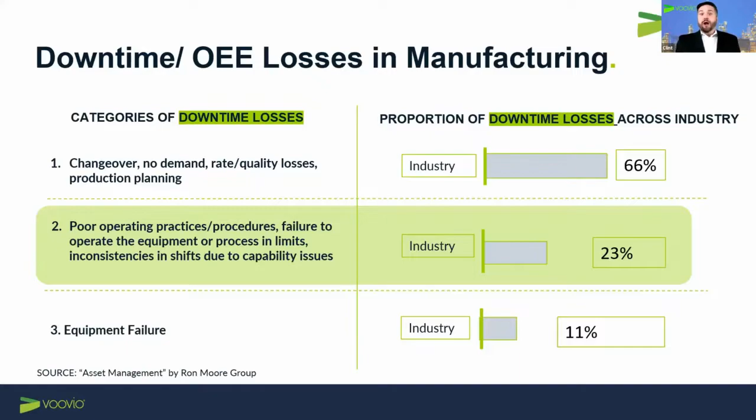There's another group, another way we'll look at this thing, that there's a group called the ASM Consortium, the Abnormal Situation Management Consortium. This group has taken a closer look into process upset causes and have made some quite interesting observations. This ASM consortium is made up of several industry leading chemical manufacturing companies, as well as educational institutions of higher learning.

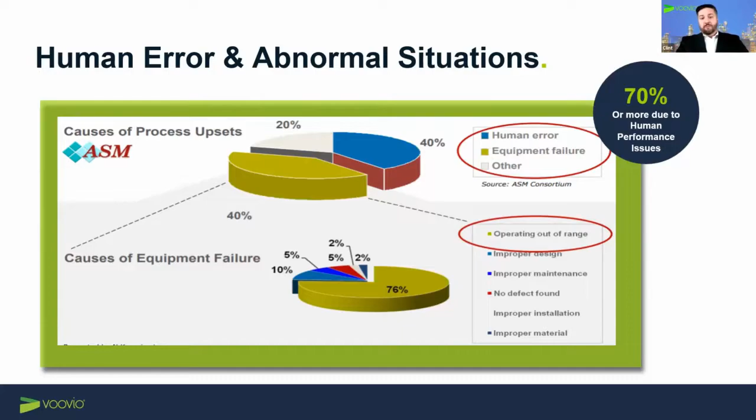As shown in the charts, they observed about 40% of process upset causes are the result of human error. Another 40% are due to equipment failure, with the remaining 20% being an assortment of other minor categories. Though, when broken down further, about 3/4 of the equipment failure category actually traces back to incorrect operation of the equipment, which ends up resulting in 70% of abnormal events being the result of some type of human performance.

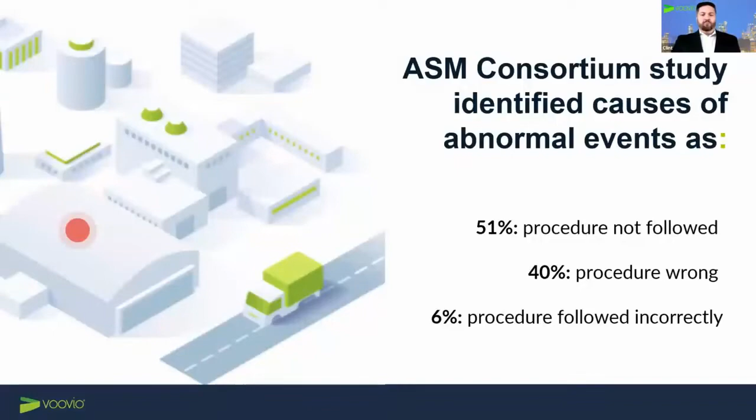So that same group observed that the vast majority of these situations that led to nearly all of these types of events would trace back to procedures, whether they weren't followed, whether they were simply incorrect, or maybe the operator didn't follow them correctly.

Obviously, the consequences of such events can be felt in the impacts to bottom line and profitability. Most obvious and immediate to most are the out-of-pocket repair costs if equipment is damaged. That's what we pay immediately to get back up and running.

But most of the time, the larger costs are actually from the areas where we don't write a check or pay money out to someone. The lost production and the profit that would come with that is tremendous. Then there's also the costs that are difficult for many businesses and companies to quantify, like redirecting those key resources, which we've already said are in short supply, to fix those situations or get the plant back up and running and stable, instead of working on optimizations or improvements that personnel are better suited to do.

Budgets and key resources required for these efforts are pulled away in a normal budget plan from other desired activities, debottlenecking and other profitable initiatives. So it doesn't just start and end with what we pay. The costs continue to spread throughout the business and organization.

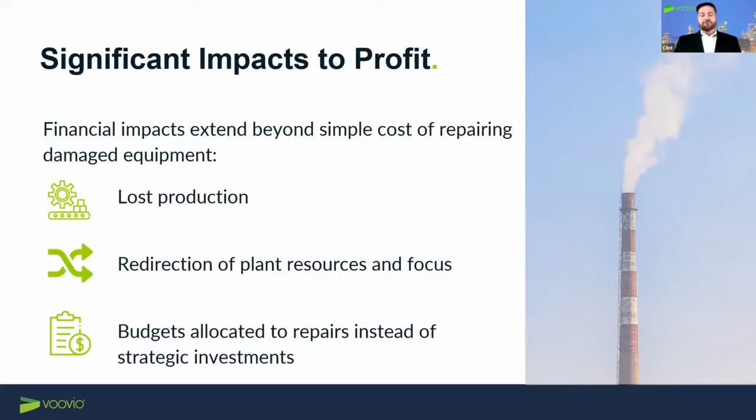Onboarding new employees is difficult and resource intensive. With most of the current training methods, operators are released as what we call qualified in their jobs without truly knowing or experiencing even up to half of the information necessary to be fully competent in their roles.

Those startups and shutdowns that may not happen while that operator is in training, that tribal knowledge is all those tips and tricks that decades on the job have taught these employees that are near retirement. We've got to capture that stuff quick, or we'll be forced to relearn it, and that's going to come with quite an expensive price tag. What a waste.

I think another interesting challenge that's being uncovered as we continue this 4.0 conversion in the industry, as we go through the automation and reliability improvement journeys, are the paradoxes we've seen by improving those areas. As described here, the more we improve in both of those areas, we simultaneously reduce the frequency of those events happening, which is obviously a good thing, though we mustn't lose sight that the potential loss of experience dealing with the issue may affect us in the future.

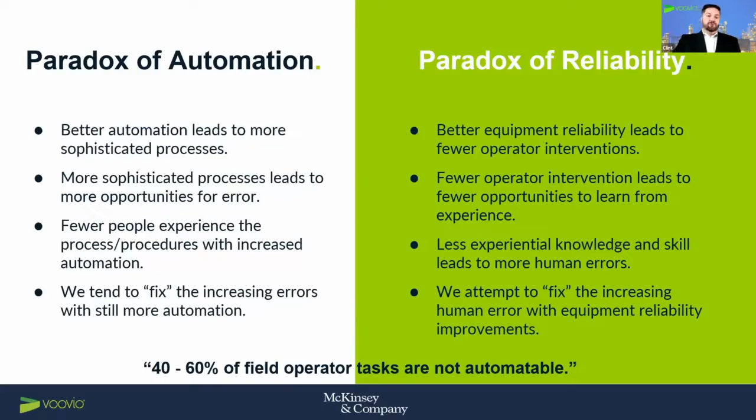McKinsey tells us that somewhere between 40 and 60% of field tasks are unable to be automated. So we will not be able to completely automate our way out of this problem. We must be active. We must take action to capture and retain the knowledge within the organization while it still exists there today.

So the solution Voovio brings to the table, our operational excellence tool, will impact what we call overall workforce effectiveness, OWE. Now that's in addition to the OEE, for those paying close attention in the beginning.

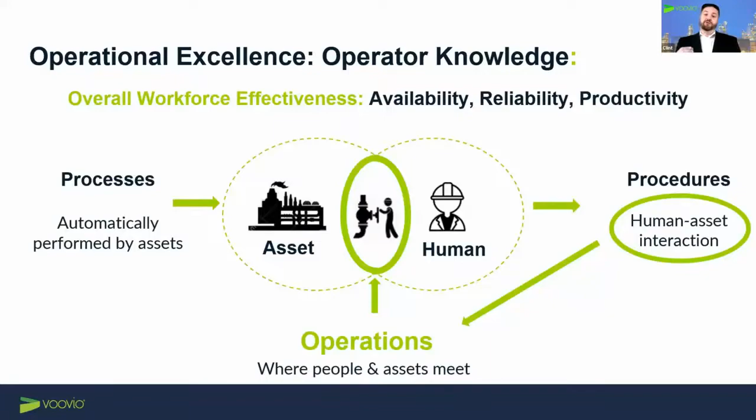Traditionally, much focus has been placed on the asset and improving its performance and ability to provide and extract information on how it's doing. But plants are made up of both assets and people. The improvement of the human elements has not progressed or received the attention at the pace or level of the asset improvements. And that's precisely where Voovio is going to fit in, right at that intersection of assets and people.

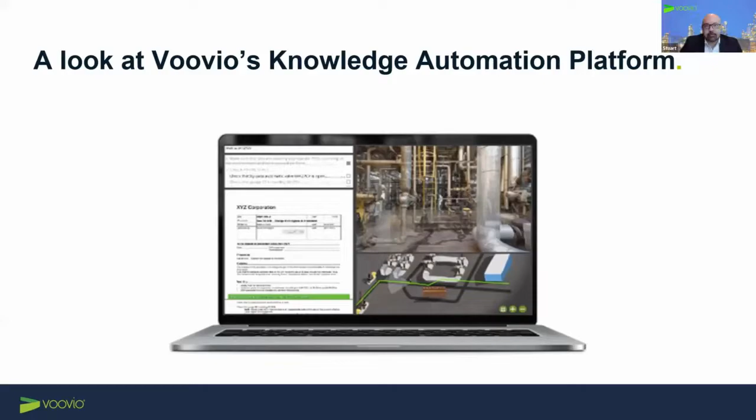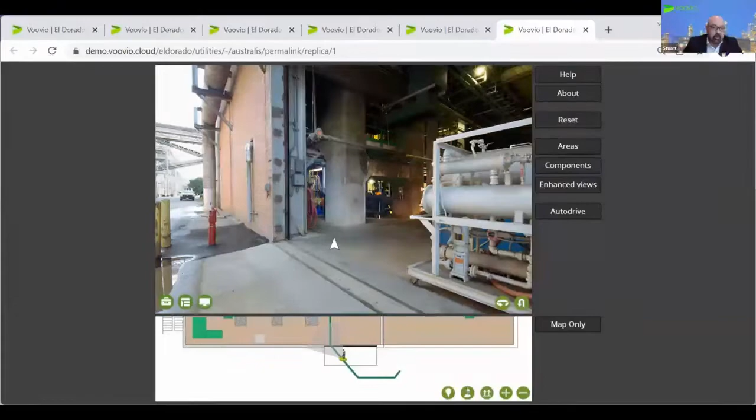Okay, thank you. So here we have, to introduce the Voovio platform to you, this is a cloud solution and it's web-based. As you'll see here on the screen, you have the home page, which has our digital replica, and below it you have the procedure simulators. Now, what do we mean by procedure simulators? We take your standard operating procedures, which drive the simulation of Voovio's. As you'll see in front of you, there's a pictorial, photographic image of a plant. Now, when I open up and press on my mouse, you'll see a white line appear. I'm actually driving this.

So what you'll see here are pictures of this asset. As I move freely into the plant, you'll see a transition start to take place. And as I move freely through the plant, just by moving my mouse to the left, you'll see that we'll make a turn, and I'll move freely through the actual pictorial images of this asset.

Now, this is where the magic of Voovio's technology comes into play, that it gives you a truly immersive experience, allowing you to traverse through the plant very freely. Again, all of these are pictures.

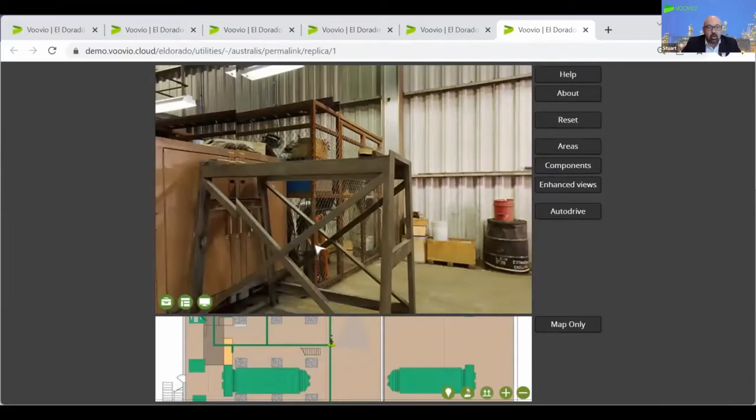You'll see here that I can actually click on an instrument. All of your instruments are tagged. Everything is there, all instruments are put in, and again, with your standard operating procedures, you see that I can play around with that. I was discussing every single instrument that's been tagged.

Also, as you know, when operators are out on the plant, they may be searching for an instrument that they have to perform a procedure on. So we have a module or component here that allows you to search for a specific instrument around the plant. If we click on what I've just searched for, you can bring it up and interact with that specific instrument. Also, the map component.

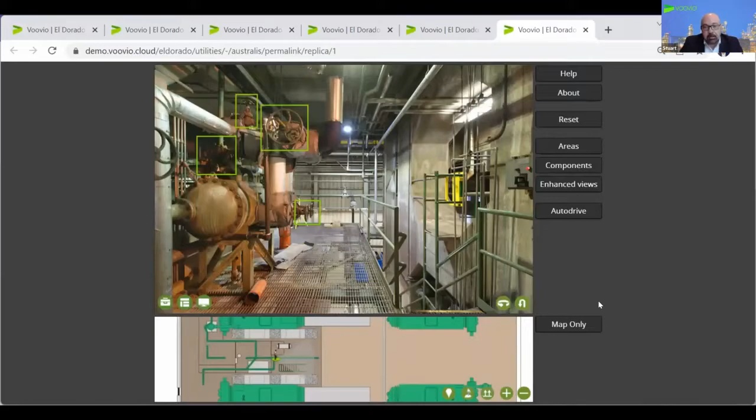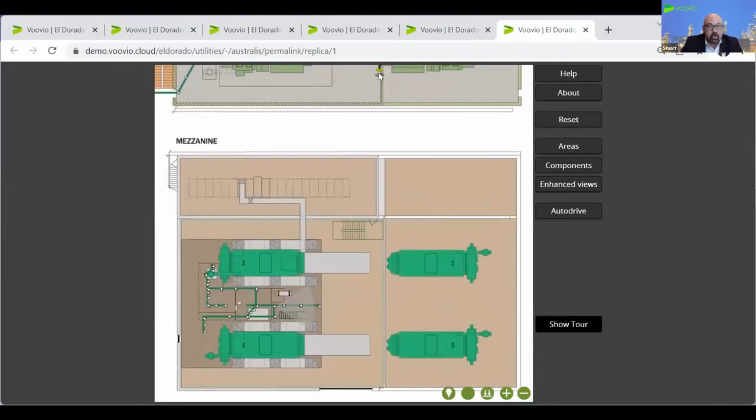Now, this allows you to position yourself anywhere in the plant. So, for example, if I pick my avatar up, which is my little guy here, I can move him wherever I want to in the plant, which allows me some free movement around the asset.

As well, we have enhanced views. So, for example, this cooling water circuit. If I bring that up, it looks fairly straightforward. I mean, everything looks exactly the same there.

But if you have an operator that hasn't done the procedure that's being asked of him on this specific instrument, he doesn't exactly know what's happening behind that. The subject matter expert may well have done this procedure many times and knows exactly what happens behind the scenes. But to a new operator, or somebody who lacks knowledge of doing this procedure, they take a look at that and it looks exactly the same.

You've got 4 manifolds there. He's been asked to connect the upstream loop with the downstream loop on the right-hand manifold. Well, how does he do that? So we have quite a nice feature here where we can actually turn everything on and see what's happening behind the scenes. You can switch your valves off and on so that you can actually connect the downstream with the upstream loop, which is a nice feature in the technology.

And now, so Clint's going to pick up the guided simulation, yeah.

Okay, perfect. So Stuart left off at the guided module. We'll jump right into the guided module. As Stuart mentioned, the guided module is like that virtual unit expert, that senior operator or subject matter expert, whoever that may be, that you want to teach these new operators, or new to the area, or refresh them.

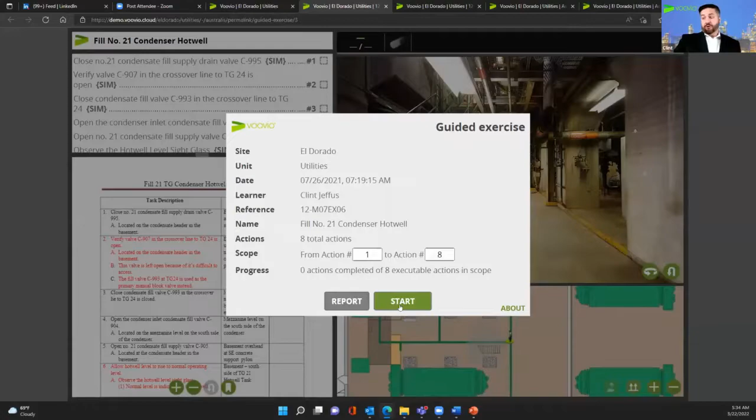As you'll see, I have a simple solution here. The start, when I hit start, it's going to walk. I'm not moving at all. So in this guided module, what you have is several sections.

To the bottom left right here, you have what would be the company or the client procedure. This is something that Voovio would not adjust or change. This was something that would be owned by the company and would be your procedure.

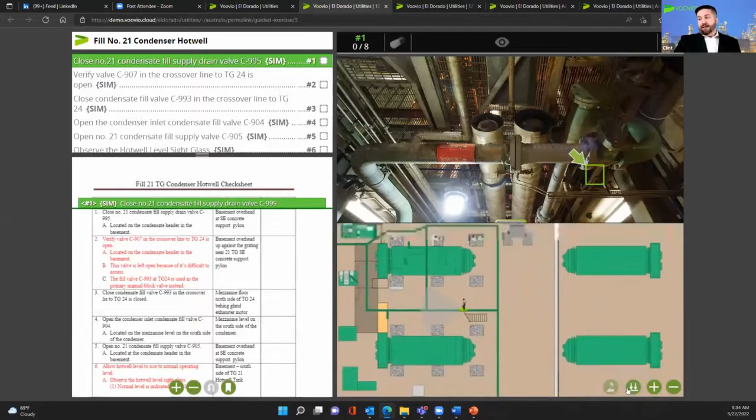Off to the bottom right, what you see is the map that gives you the footprint of where your avatar, that Stuart showed before, would be in relation to the plant and other equipment. What you've got at the top right is the replica, or a copy of the replica, as it pertains to the procedure. This area in the top left is what we call our action checklist, that Fran mentioned a little bit earlier.

We break things down and really get detailed with the procedures. If something says line up the pump, how many valves and drains and things need to be open, we're going to break that all the way down for those guys.

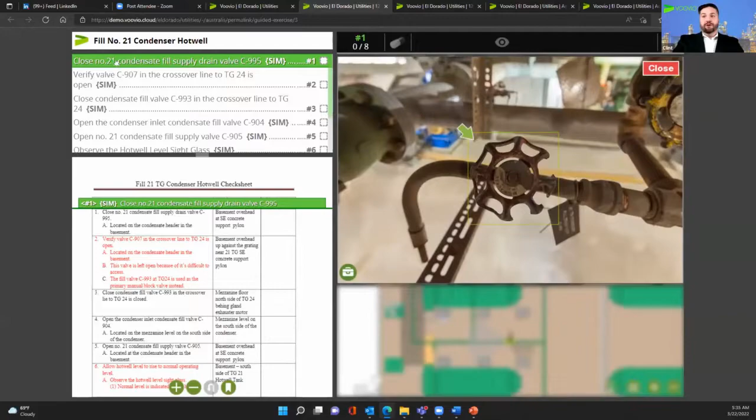So just jumping right in, what you'll see is this tells me exactly what to do. Step 1, close the condensate fill line. So I get in there, I actually interact with the valves. Say I did that, close, move on. The next section tells me right what to do.

Okay, we're going to open it. Key point here, what you'll see is that pop up immediately right at the step where we are.

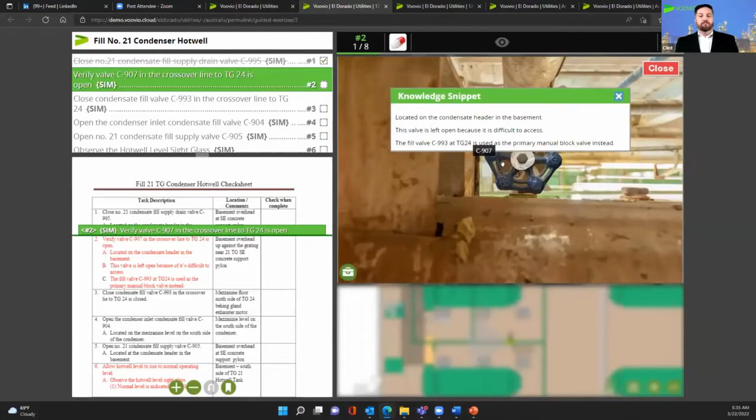This one is just text. This is what we call a knowledge snippet. It comes out of a little pill of information. This one is text, but you can put videos, PPE notices, you can make this anything you want that operators would need at the point of access, to move on and complete their job safely, effectively.

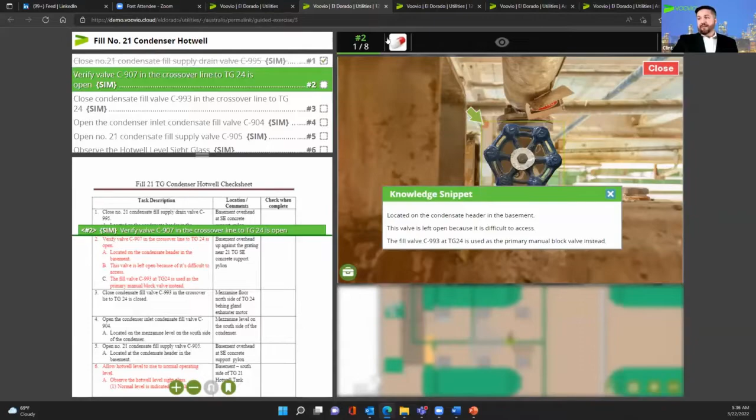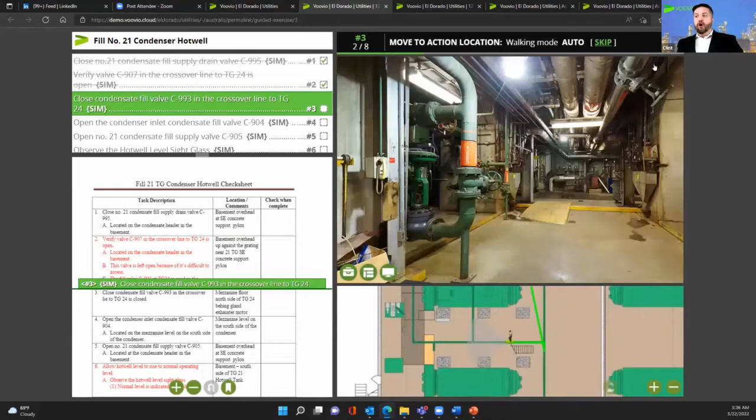So, yep, I got that. I'll minimize it. This says I should check it, close it. Great. And so again, what you see is this virtual trainer, like it would be someone holding your hand, walking you through the unit, going on to the next step.

So I think we get the point there. So then what does this lead us to? Do we just train only? No, so this is what we have, the test module.

You'll see a little bit different, but quite similar. And so here you see you have your procedure document. You also have this test report that shows up. Same format up here with the action checklist and the map available on the bottom right. But this time you see I have no white lines. I have no direction. I have no SME coach. I'm on my own in the test module.

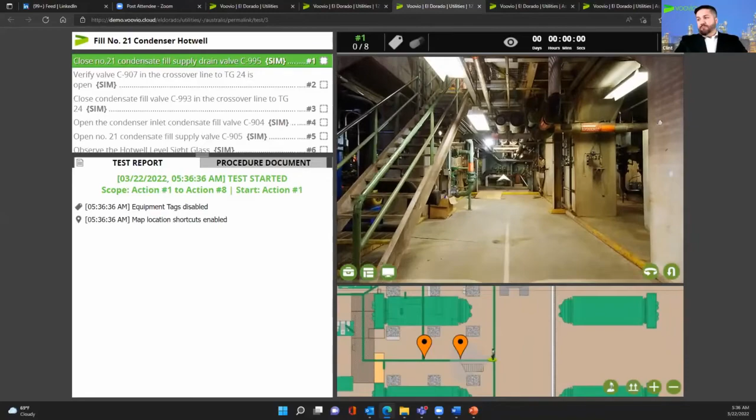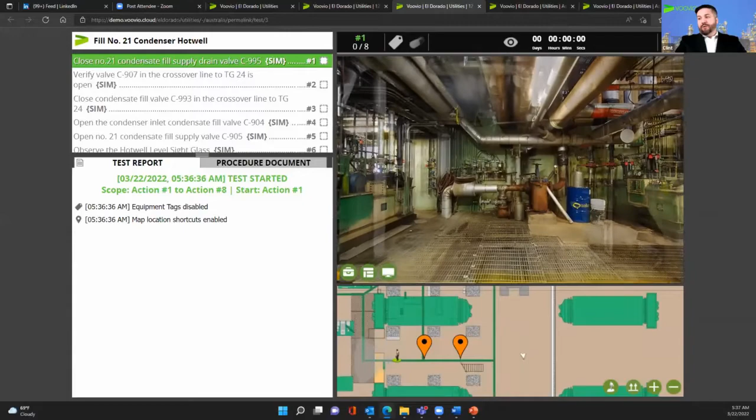So as I move forward, walk down, we can look up. You can see you have the same degrees of freedom that you have within the plant everywhere.

And we want to start where we were before. So step 1, close the condensate valve. So I'm going to do this action. Done. You see what you get here is immediate feedback from your trainer. Yep, green is good, did that right.

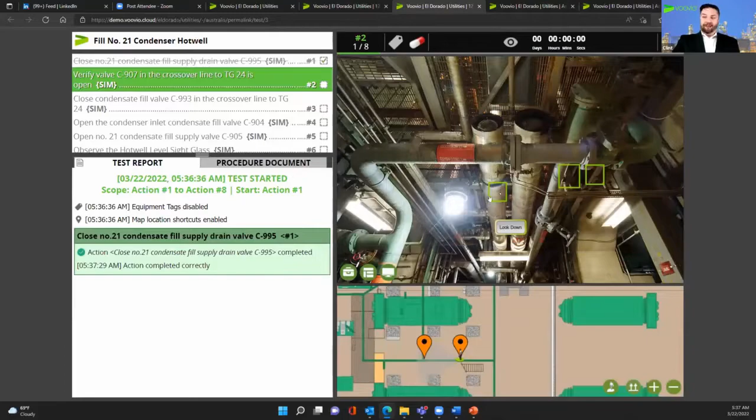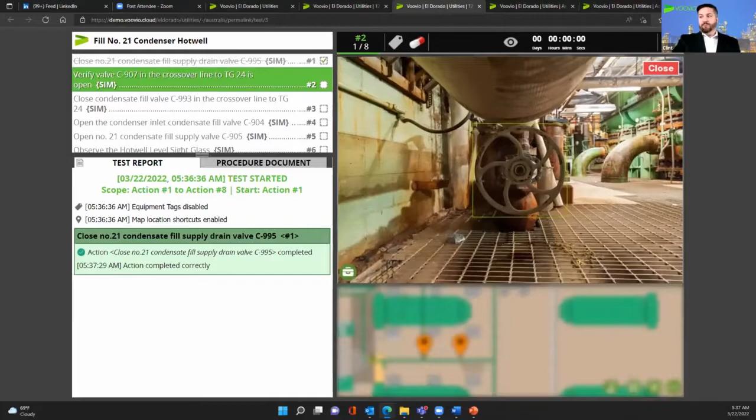Great, so what's next? Okay, I know the next one is this little blue valve that stays open, but let's say, what if I make a mistake? So I'll go down and let's grab another valve. Let's say I think it's here. What happens? So I'm going to open this one. Oh, hang on, I interacted with the wrong instrument. I opened the wrong valve. I did not open my knowledge snippet.

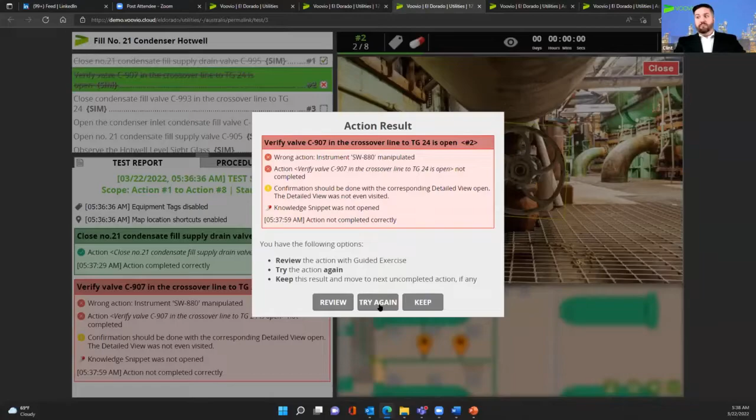It gives you all this information of what you did, what you should have done. And the great thing about simulation, as always, you can review, jump back into the guided module, or you can try again. So you can go back in the simulator, turn back around. I could have picked the guy up and walked him back if I wanted to.

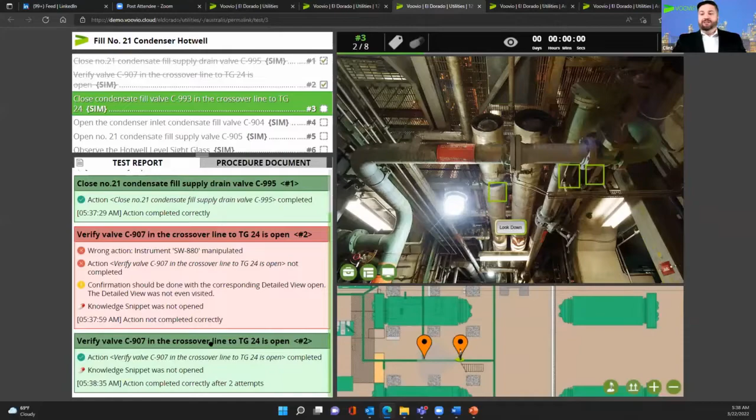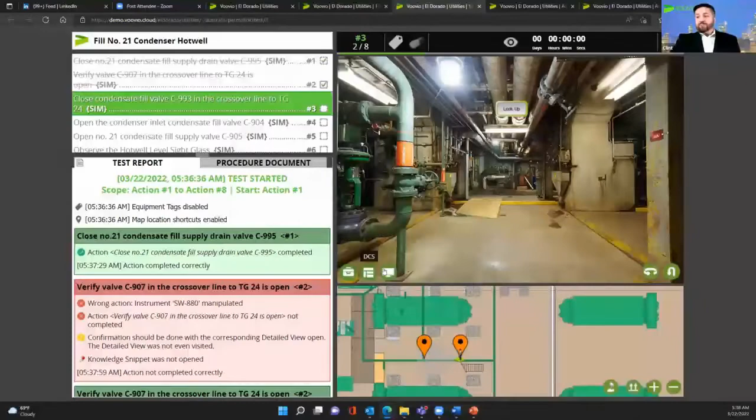But I'll go back, look up, say okay yeah, I remember it's this one with the knowledge snippet. Now I'm good, okay, I'm green again. So you get this interactive teacher that really will show you what you need from the solution. So again, you have all the items you need right here in the trainer, virtual SME, with the feedback that the trainer would give you.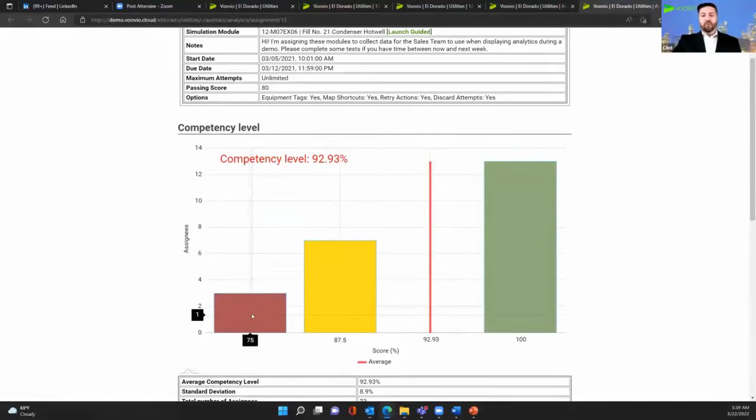That's great, the average, the people that barely passed, but you see the concern area is the people that made below what we define as the passing score. So again, I want to look a little bit more into that. We want to focus on those 3 people.

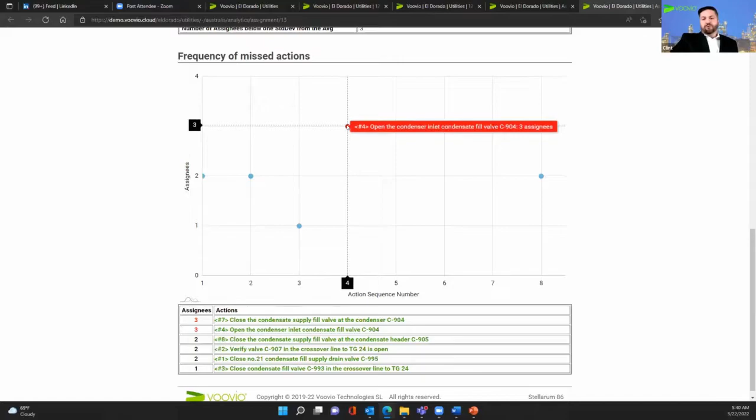So even more diagnostics, digging a little deeper, we can look at our frequency of missed actions. You've got an action sequence number here in this short procedure that was 8 steps, and then the frequency that it was missed by assignees. So if I go here to step 4, I can see that it was missed 3 times on this action. So I want to jump in and see what may be going on before I go interview people and run through the whole plant.

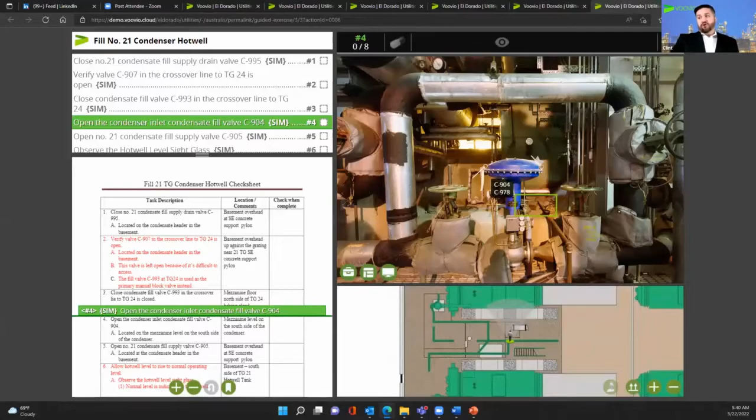So I have that shortcut, jumps me straight into the simulator. And immediately I can see, okay, these are close. And upon a little bit of investigation, the people were manipulating this valve right here.

Very similar valve. So do we make a physical change in the field? Do we focus on training? Do we do labeling? Do we change the valve totally? It's really up to the customer at that point, how to address the issue. But you've got these diagnostics that take you straight to the problem immediately and quickly.

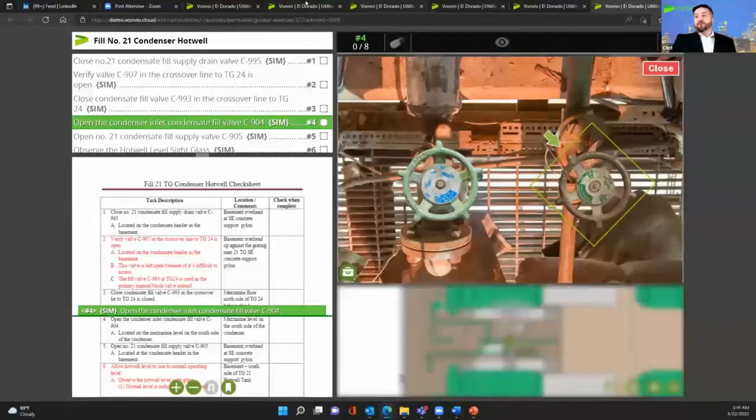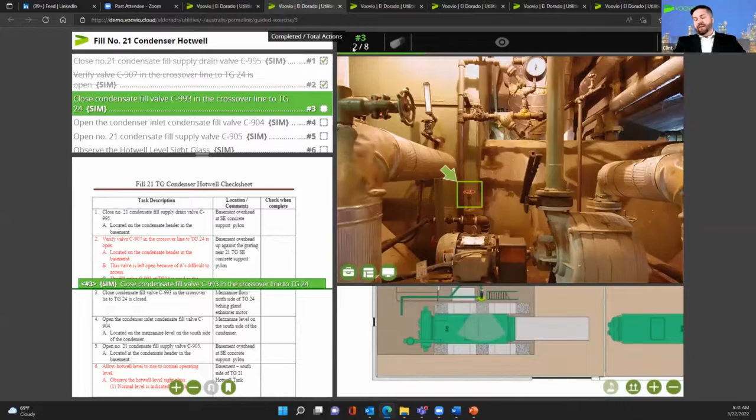So it wants me to do the procedure, but again, you can see these simulators. And as I jump back to the guided module, just so you can see that player walking you through how Voovio really establishes that imprinting from the photorealism.

So as Clint started talking about, he's talking about the challenges in the industry, and in addition to the challenges around turnover, unplanned downtime, significant issues with human error, operator execution. Something else Voovio brings to the table during all our projects is procedure clarity to the operators.

So let me explain what I mean by that. Most procedures that we see in industry are written at a higher level than are executable by the operator. So what we do when we create a project for our customers, we ensure that there's clear and concise actions. And I'm going to show you an example of that.

Once those clear and concise actions are generated, in addition to the pictures, the JPEG pictures, digital pictures that we take in the area, we marry those to the actions. So then the operator is able to visualize those procedures in the field, so they clearly understand what they're being asked to do. And then, as Clint was beginning to show, the simulators.

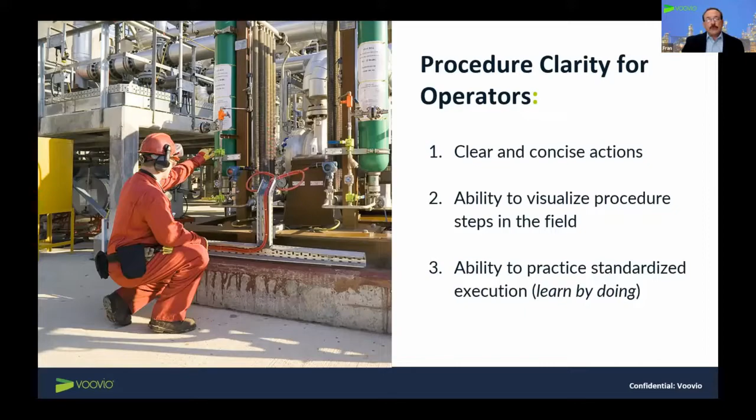So the simulators afford the operator the ability to practice those standardized procedures and learn by doing. Why is that important? So during the lifespan of all our projects over the last 3 years, we gathered a bunch of data from our customers' projects, analyzed about 300 procedures.

And you can see the breakdown on the left of the types of procedures. Most of them startup, shutdown, and equipment swap procedures. 90% of those procedures contained ambiguities.

And I'm going to show you a really good example of that in the next slide. But to the point number 2, ambiguities and generalizations. Procedures are written and not always in favor of the operator. Very common in our procedures and our customers' procedures.

We see comments like 'line up the pump,' but it doesn't actually explain to the operator how to line up the pump. Or 'open all the drain valves' - well, how many drain valves? So those ambiguities are across all our customers' projects.

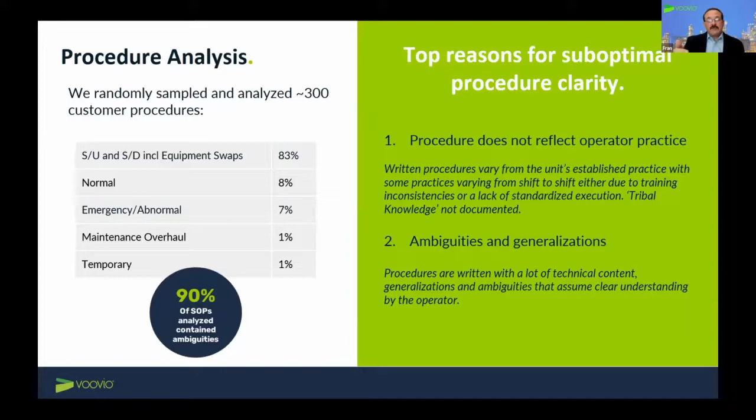The first point, again, a challenge across all our customers, is the procedure as written does not match the operator practice. And even to a point where there are different practices within a single unit across the various shifts. That's a significant challenge if you're looking for standardization of execution for the procedures when it comes to starting up and shutting down a plant.

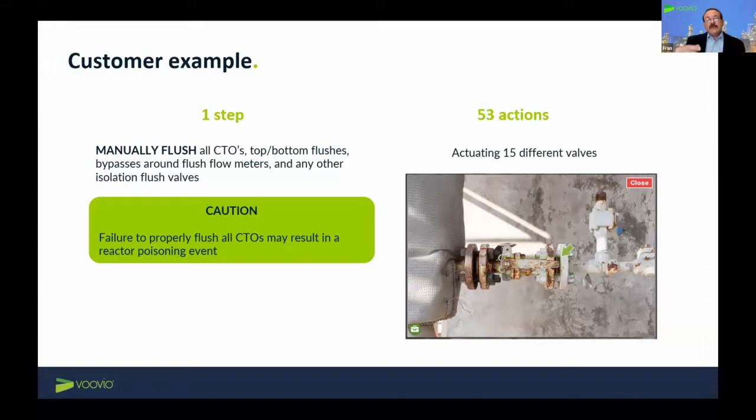When we walked this procedure in the field and created an action checklist for the operator to follow, there are actually 53 actions across 15 valves and other components that the operator had to perform to successfully complete this one step. So again, it's the clarity that the operator needs to effectively and efficiently execute that procedure.

So that's procedure clarity. But once we have that clarity, I mentioned learn by doing - this is the learning pyramid. It's very common in industry, but I bring it up today to really remind the audience the importance of giving the operator the tools that's going to help them remember and retain what they learn as they qualify, practice on the job, 2, 3, 10 years into their job. They will remember simulation and actually performing the job.

They retain 90% of what he or she does. Whereas if they're just given a written document to read, they will not retain that information. It's documented time after time in industry. We've done exercises with our customers, and they themselves have been able to demonstrate the same level of retention with their operators by practicing the Voovio simulators, coming back months later, testing them on that same content, and the retention is 90% plus.

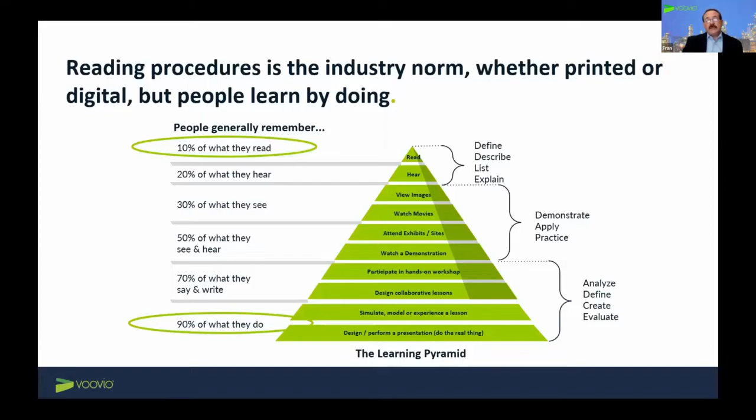So then take the procedure clarity, the ability to practice using simulators. What we are seeing, and I'm going to show some case studies after we see if there's any questions, is a 30 to 50% reduction in time to qualify new operators, as well as 100% gain in competency. Why is that? Well, on the y-axis is operator competency.

On the x-axis is time. The traditional way of qualifying an operator is shown in this gray arrow, and it involves reading, classroom time, job shadowing, maybe a written test, a field test. With Voovio, giving the operator the ability to learn and practice on their own time, independent of the availability of an SME, they practice this content 24/7, take a standardized test, and demonstrate competency.

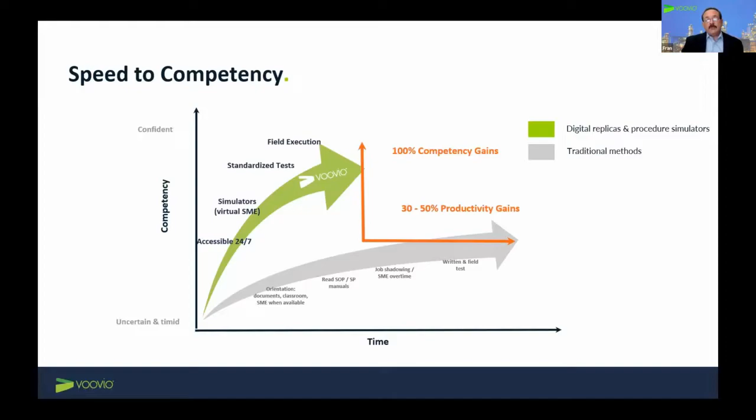They're able to practice procedures when the plant is running. All too often, operators cannot start up a reactor or shut down the plant because production's needed and they need to run. With the simulator, they can practice and demonstrate competency on all the procedures. So we're seeing significant gains on onboarding and less reliance on SME time.

So to summarize all this, the five solutions that Voovio is bringing to the industry and our customers is all around bridging that gap that Clint showed earlier, bringing the human competency to a point where they are effectively operating the units. And it goes back to what I showed about practice and procedure aligned. There is no more practices that don't align against a standard procedure. That way, when a unit needs to start up, the unit can count on the procedure being executed as written, not some practices, tribal knowledge that has not been reviewed and accepted by the organization.

An action checklist - it's very detailed, kind of like a pilot's checklist. It's giving that operator every action they need to perform to successfully start up that procedure. I mentioned the benefits of learn by doing, giving the operators the simulators, letting them practice, letting them be comfortable, refresh just prior to going out in the field and executing.

The ability to test the operators on those procedures, demonstrate competency prior to executing in the field, documented standard execution, even the ability to go back one, two, three years later and have them retest and redemonstrate competency. And then lastly is refresh and ensure accurate execution. They can refresh, practice with the simulators, go in the field, and when they're in the field, there's actually another tool that we have available to them, which is a field execution tool, and they can actually use it as a digital aid in the field to execute efficiently and effectively.

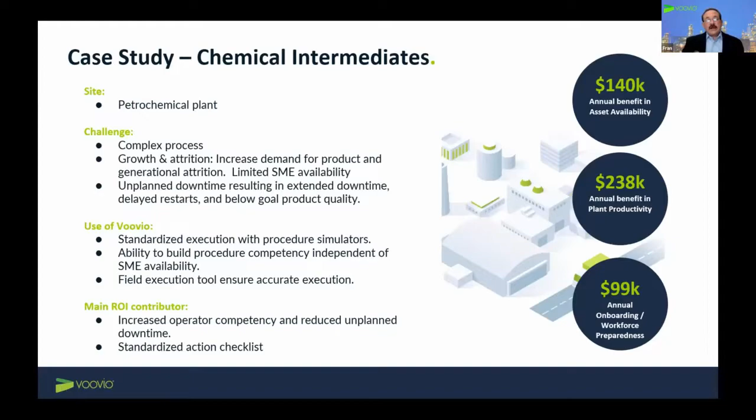And you can see off to the right some of the benefits they realized on better OEE or asset performance, improved productivity because they were less reliant on the technical and SME experts, and then benefits related to onboarding - less costs associated with onboarding operators, and they were onboarding them faster.

Another case study, similar setup. This one was in a technical gas plant, one of the smaller gas plants that support the larger refineries. This was a significant issue for this company because when they had issues keeping their plant running, it would impact and affect the refinery, which is significant. So again, unplanned downtime. Their challenge was around swapping and starting up boiler feed water pumps.

A lot of that was attributed to high turnover. They would bring operators in for 2-3 years, then they would leave for other jobs, either in the refinery or other sites along the Gulf Coast. So again, we created the simulators and afforded the operators the ability to practice startup and shutdown of the boiler feed water pumps just prior to going to execute, and it eliminated their issues with the pumps.

You can see the benefit on the top right around improved asset productivity. In addition, having the field execution tool and the ability for the operator to have their curriculum and train on it, they were able to onboard faster, more efficiently, more effectively. This small unit even realized $67,000 a year in savings with reduced onboarding time, training operators more efficiently and more effectively.

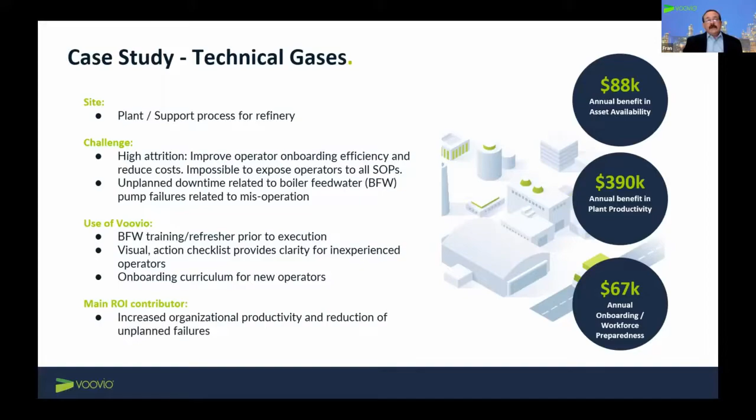The last case study I'll share is another chemical plant, with very similar challenges. It's a challenge across all of industry - Clint touched on that - we're losing our experienced resources and bringing in a new generation. The new generation learns differently.

So using the digital tools, we worked with this unit. We created action checklists, providing clarity to operators by marrying that action checklist with the component pictures, creating the simulators, and allowing them to practice and demonstrate. This resulted in $138,000 in savings related to onboarding operators more efficiently and more effectively, along with benefits around asset improvement and productivity improvements.

So again, the simulators afford the operator the ability to practice prior to execution, demonstrate competency, and then execute in the field accurately in a standard way every time.

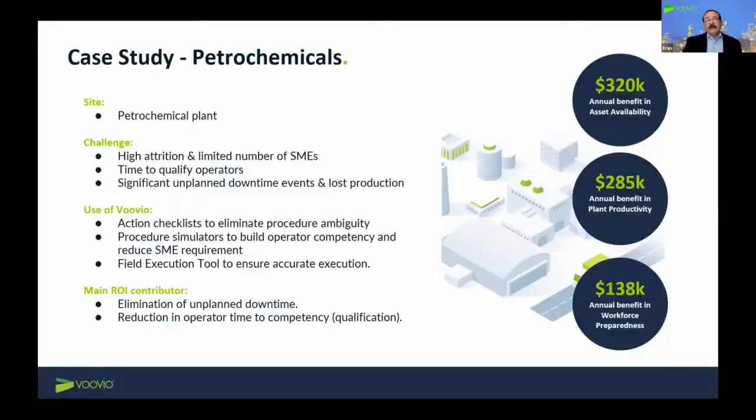I guess the question may be - correct me if I'm wrong - responding to whether we replace field training with this. And the answer is no, we don't have anybody doing that yet. What we do is reduce that time down by up to 90%, 70 plus at most of our case studies that have done the side-by-side comparison. So we don't completely replace training. I would not want to tell people to send operators out there if they've never been there before. But when they get there, it's like they're going back to a place they've been rather than going out for the first time. So you can imagine the speed - like the charts Fran showed - time to competency is on a whole different level when employing Voovio.

Yeah, excellent point, Clint. It definitely reduces the time to competency.